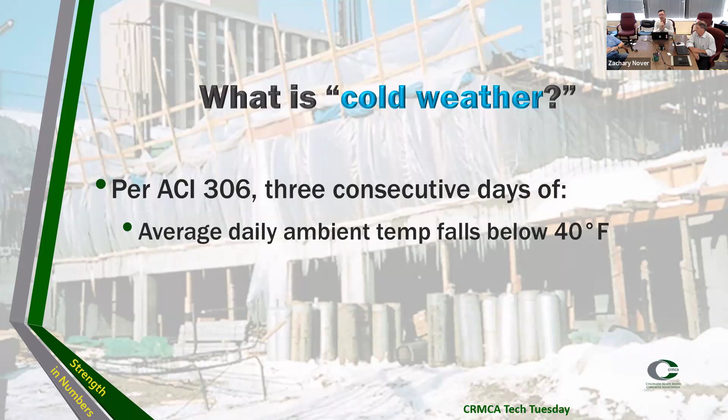Take the temp once an hour and average those temps together. If the average is falling below 40 degrees for 3 consecutive days, that is considered cold weather, and we'll want to employ our cold weather procedures.

Also, if the air temperature does not rise above 50 degrees for more than half a day in any 24-hour period, that's cold weather too. If we start placing concrete at 4 a.m., then between 4 a.m. and 4 a.m. the next day, if the temperature does not rise above 50 degrees for more than 12 hours, that is cold weather.

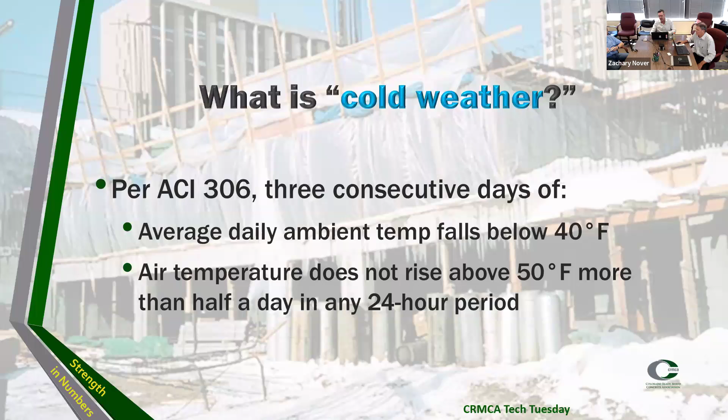So now that we have an idea of what we consider cold weather, let's talk about some challenges to cold weather placement. This shouldn't be news to anyone who's been working in the industry for any amount of time, but it definitely bears repeating, so let's go through a few.

Frozen ground. This is a big one - frozen subgrade soil, snow, ice, these sorts of things. You're going to encounter them. Maybe not necessarily if you just opened up a hole, but if your project is sitting out there in the elements, there's a potential for freeze, and we obviously don't want to place concrete on frozen ground. We're going to get into more detail on all of these.

Rapid temperature changes. This is a big one here in Colorado. We all know how the weather can change around here. Was it last winter or the winter before - I think it was like 70 degrees at noon and 10 below the next morning. So we definitely have our share of rapid temperature swings here in Colorado.

Improper curing - now we're talking curing compounds, finishing times, blankets. We're going to talk about blankets a lot because blankets are a big deal. You cannot get enough blankets.

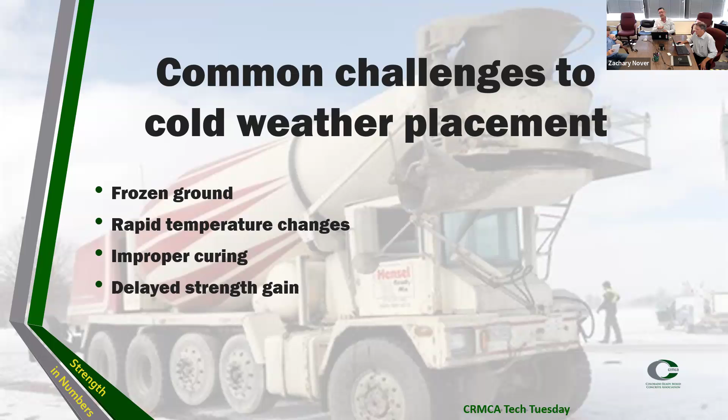Delayed strength gain - as the concrete temperature drops, it doesn't hydrate as quickly, it doesn't gain strength quickly. This is a big deal if, let's say, we're doing some emergency repair in the street and we need it to gain strength quickly because we've got to get that road open again. The last thing we need is our slab exposed to the elements, taking its sweet time to gain its strength.

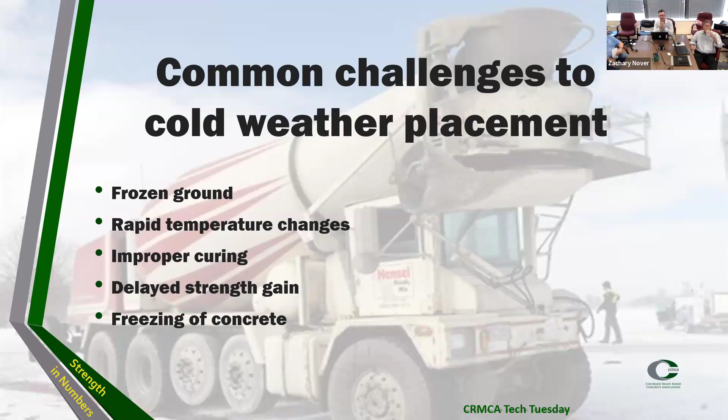And then of course, freezing of concrete - the absolute worst case scenario. We didn't cure it right, we didn't prep our subgrade right, et cetera, et cetera. Now we have actual water freezing in the concrete, which is highly detrimental to the finished product. So, frozen ground.

What's the problem with frozen ground? Well, one, it results in uneven curing and cracking due to the temperature differential. If I put in 75-degree mud in the ground and the ground is 25 degrees, once that ground starts to thaw, it's going to take a lot of the hydration heat out of my concrete. Now the top is going to be warmer than the bottom - it's going to cure faster at the top than at the bottom.

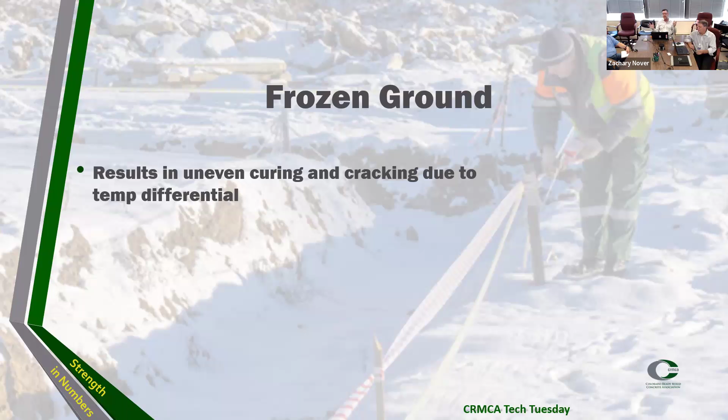Also, there's potential for subgrade consolidation or subsidence. This is really the big deal of placing concrete on frozen ground, because obviously when that ice and soil melt, that soil is going to collapse, because ice has a fair amount of volume, much greater than liquid water. So once that soil - it may seem solid, it may seem hard as a rock, and it probably will be hard as a rock.

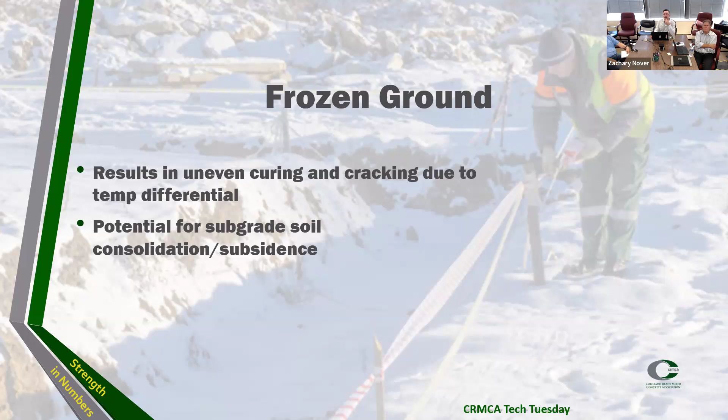It's got ice in it. So as soon as that concrete hits that soil and starts to melt that subgrade, your subgrade is going to start to shift, it's going to consolidate, it's not going to hold up. Even if your slab is perfectly placed, beautiful concrete, if your subgrade soil is frozen, you're going to have issues with cracking, subsidence, and just a poor quality product once that subgrade warms up.

So, rapid temperature changes and improper curing - what do we mean when we say a rapid temperature change? We just talked about it a little bit, I gave an example, but going back to ACI, rapid temperature change is generally considered to be a change of more than 20 degrees Fahrenheit within a short period, such as a few hours. It's not specific, like 45 minutes or 2.5 hours, just a few hours in general. And obviously as we're moving into cold weather, this is going to be a big thing in the fall, and a lot of times in the spring too.

It'll be gorgeous in the afternoon, and as soon as that sun goes behind the mountain, temperature drops really quickly. So that is a consideration when we're trying to get work done with our shorter work window that we have in the winter time.

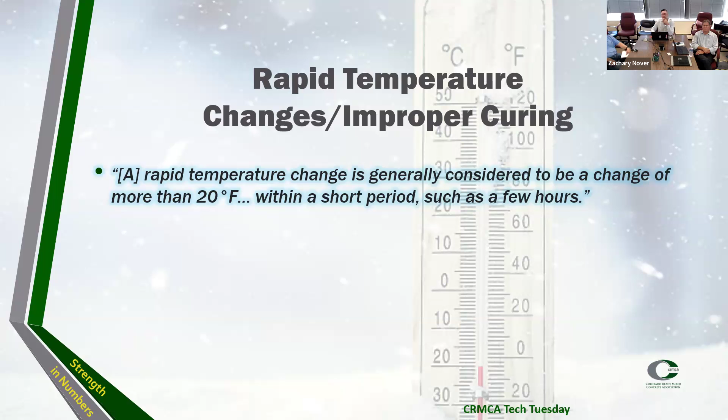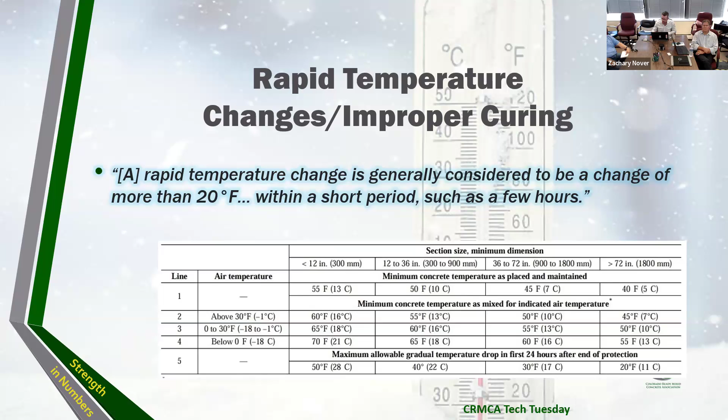Here is table 5.1 out of 306, just to give some examples of what they say. If this is the size of your slab, this is the thickness of your slab, these are your ambient temps, this is the maximum temperature change that's allowed to guarantee, or at least make it far more likely, that you're going to end up with a good product. So again, that's table 5.1. If you want to go over that, peruse it on your own time there, please do.

Freezing of concrete. Now we know water expands, right? Water expands up to 9% by volume when it freezes. So what's going to happen to my concrete? Put it down, it takes up this much space, but now that water starts to expand, now the voids in my concrete are going to increase, right? And then when that water finally melts, now I've got voids in my concrete. It's not going to be nearly as strong as it would have been, right?

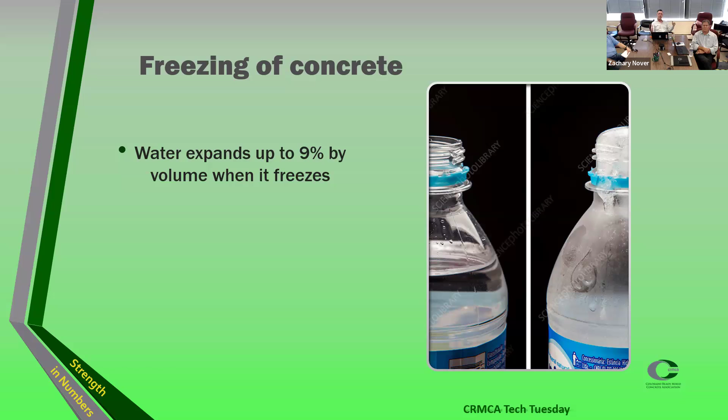Because we know even with air entrainment, right? We need some air entrainment because of the freeze thaw, because the water expands. We need some space in there. But we also know that, once you reach about 8% air, every percent that you go over is going to reduce your compressive strength by about 500 PSI. Again, because you've got more voids and less aggregate, less cement, right? So once that water freezes, expands the volume of our concrete, and then it thaws, now we've got all these voids in our concrete that are just going to affect...

Integrity of our slab. So we really want to protect against freezing. The concrete we can work in cool, we can work in cold, but the concrete itself needs to be maintained so that at the very, very least, we don't freeze, right? And the water in concrete capillaries begin to freeze at about 28 degrees Fahrenheit.

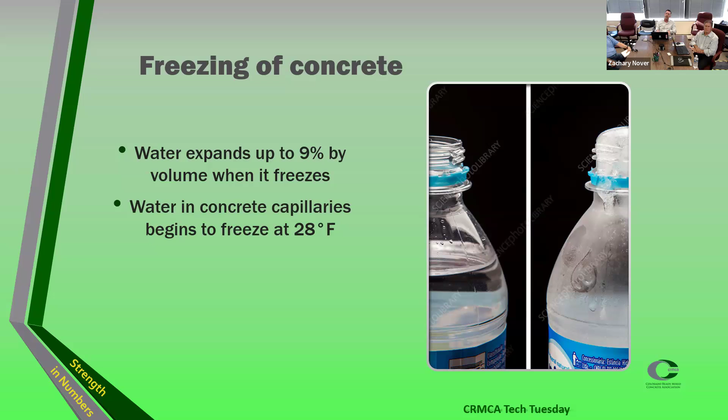Now, why is it not 32 degrees? Well, I suspect it has something to do with the heat, right? The exothermic quality of the cement hydration. So it's making heat in there. And pressure, I suppose, too. But now I don't want to get too far out over my skis. Someone who's more of a chemist or a physical sciences guy could probably explain it a little bit better. But this is one we really need to watch out for.

Concrete surface can begin to freeze above freezing, whereas the slab might not freeze until it's below 32 degrees. The actual surface can begin to freeze at around 35 degrees Fahrenheit. So really important when we're pouring our slab, and I'm mostly thinking about flat work.

It's not as much of an issue clearly when we're pouring into a form. If we're doing piers or grade beams or things of this nature, when you've got a big block of mud, it's not necessarily going to be so much of an issue. But when we're talking about flat work, PCCP, sidewalks, curb and gutter, etc., where it's going to be exposed until we can get the blankets on it, right?

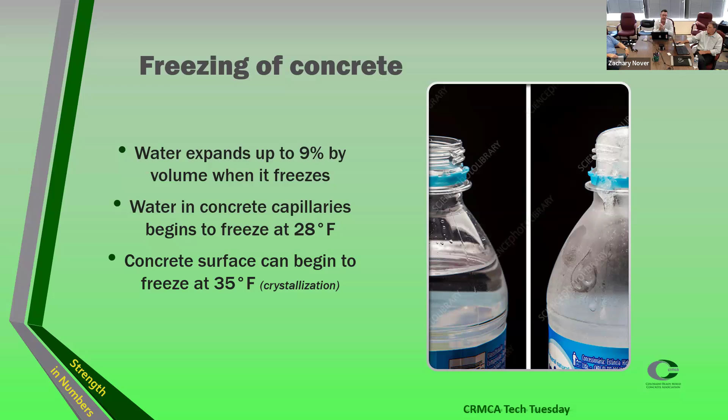So it's very, very important. We get that mud on the ground, we get out there, we finish it, we get the blankets on it before the sun goes down, so we can reduce the chances that we're going to have frozen surface. Because we know, when the surface is not properly cured, not properly finished, that's where we get spalling, that's where we get degradation of the concrete surface. So it's really, really important that we get that concrete on the ground, get it finished, and get the blankets on it as quickly as we can.

I recall one time I went out to the RTD bus barn out in Boulder. They were doing some work in the bus bay and had some high early mix because they wanted to get the thing back into production. So I went out there, I think it was September, and it was like 90, 95 degrees that day. It's a high early mix, right? They want to get the thing open. So I make my cylinders and put them in a bucket of water so they don't get too hot.

Next day it's like 35 degrees in the morning, and that bucket was sitting outside, cold water, cold cylinders. They wanted a one-day break, like a twelve-hour break. So I take it back to the lab. I know it might have broken at like 300 psi. I'm just like, oh my God, what did I do? Well, put them in the fog room. They warmed up. The next day they started making strength, and three days later they're right back where they should be.

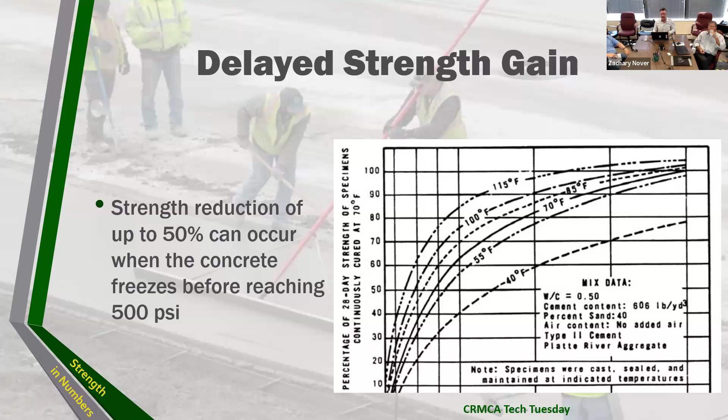All right, so again, keeping the concrete warm throughout the curing period is going to go a long way to making sure that we get the product that we intended.

So knowing all these problems we have with cold weather concrete, what are some mitigation strategies? I've broken them down into basically three categories: subgrade prep, placement procedures, and curing and protection. So we'll start with subgrade prep.

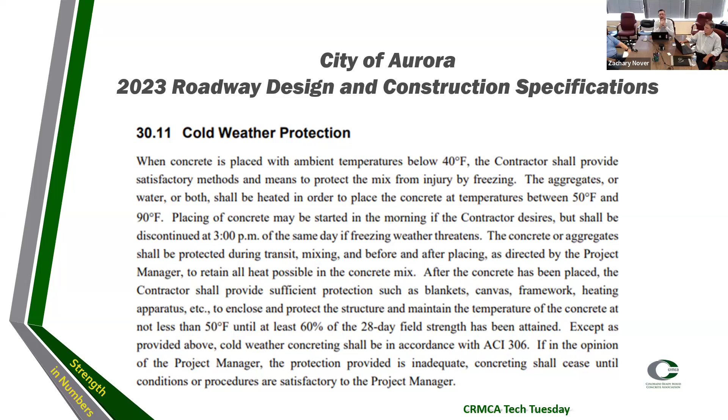That's basically what governs placing concrete. So everyone's going to basically follow their specs in accordance with 306, tweaking it here and there depending on what your local situation is.

So again, subgrade prep. This project was one I worked on for the city a few years ago — the Tollgate Creek Trail Phase 2. As you can see, it's a bright sunny day, there are their blankets. They came through the day before, scarified, moisture conditioned, and recompacted. I cannot stress how important it is that the subgrade be properly prepared.

Again, you could have the most beautiful mud, you could have the most crackerjack crew, ace finishers, your blankets — you've done all that stuff.

But if your subgrade is not good, and this goes for anything you're going to build—we're not talking asphalt, we're talking concrete, but anything you put on the ground—if that subgrade is not properly prepared, it's not going to perform the way it should. Your breaks might come back through the roof. Oh my God, 5,500 PSI at 7 days, this mud is great. But they didn't pull all the chunks of rock, ice and snow out of the subgrade before they placed it. So guess what? In the summertime, we got cracks everywhere.

What happened here? It's so very important before you build anything, prepare your subgrade. We're talking cold weather, and I'm focusing quite a bit on flat work, but this all applies to any concrete structure, whether it's in forms or in the ground. Drilled piers is a whole different animal, we're not really worried about that so much, but we do, because we don't want our hole to collapse. We don't want ice and mud in the bottom of our drilled pier either. So even in that instance, you need to clean up your workspace and make sure your soils and surrounding environment are properly prepped to accept concrete.

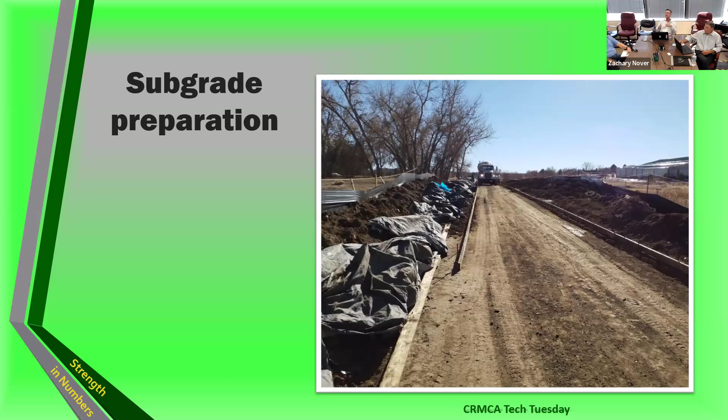So again, these guys did a really good job, this came out really well. As you can see, they were out there the day before, they cut it to grade, and places where they needed to condition, they did. We got our density testing, everything looked good. They had their blankets on it all night, and this is probably 9 or 10 o'clock in the morning. They probably did 50 or 60 yards, because we had that shorter work window. We don't want to go into the afternoon. By the time we get into that last truck, we need to be pulling blankets, the sun's about to go down. So subgrade prep is just so important.

So different methods of prep: one, you can remove and replace your frozen soils. That seems like a no-brainer, but if you've got frozen soil—and everything in Aurora is clay, and clay typically has a pretty high moisture content, it likes water, or rather the water likes the clay—so frozen soil is quite a problem. Whereas in some places we have sandier soils, it might not be as big a deal because it's easier to thaw out, and you might not necessarily need to pull it out and put it back in.

You might want to do something like ground heaters. Ground heaters will work on anything, but it depends on what you're going to build and how suitable or unsuitable the soils are. If it's good material and you can get away with just throwing some heaters out there and keeping the ground above 32 degrees, preferably warmer, throw some blankets over them, that's great. But if it's somewhere near a watershed or in a lower elevation, lower topography, where water has been collecting and there's 3 feet of ice—I remember one project where they had to get out there with a D6 and just rip it because it was 3-4 feet of ice. Ground heaters would not have done a thing there. So if you can condition the soil without having to tear it out or heat it up, that's great.

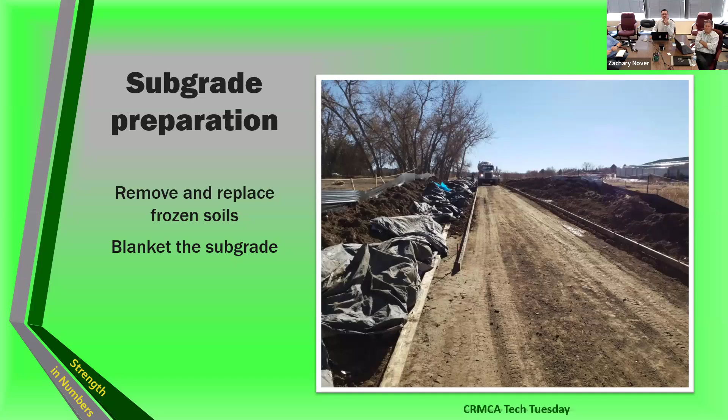So subgrade prep, right? Very, very important before we build anything. Make sure that the subgrade is suitable for placement. So we got our subgrade prepped, it looks good. Here we go. Here are the guys again out on the trail. There I am taking my picture.

When we're placing the concrete, plan around the weather. This is probably 9 or 10 o'clock in the morning. We got out there early enough to pick it up and keep pretty good production on this job, we put a lot of concrete down. This was in December, I believe, and we put quite a bit of concrete down in December. But we had a shorter work window. We would get out there and place concrete 9, 10 o'clock, maybe by 2, certainly by 3 the finishers are off of it. The blankets are on it when we're packing it up for the day.

Zach, we have a question.

When would you say it's safe to remove the blankets? From the subgrade, or from the concrete? For the concrete, I would say you leave the blankets on until you're about to pour. Leave them on until the guys are standing there with the tools and the truck's rolling up, then you can pull your blankets off. You can keep that heat in for as long as possible.

For the concrete itself, typically we'd want 5 days, 120 hours, something like that. We're not trying to get out on it. Something like this, which is just a recreational trail, we're not worried about getting it open right away, so we can leave those blankets out there 5 days.

Definitely you'll want to maybe take some extra cylinders when you're testing it and break some early. Of course, the lab cure is not in the same condition as the field, and we'll talk about field cure systems and cylinders a little bit later. But if you're worried about getting it open, if you have time, leave it out there for 5 days. If you're really worried about it, take a couple of extra cylinders, do a 1 day break, a 3 day break, a 5 day break, whatever you need depending on how quickly you feel like you need to get on it. But if you're not in a big rush, I would say 5 days.

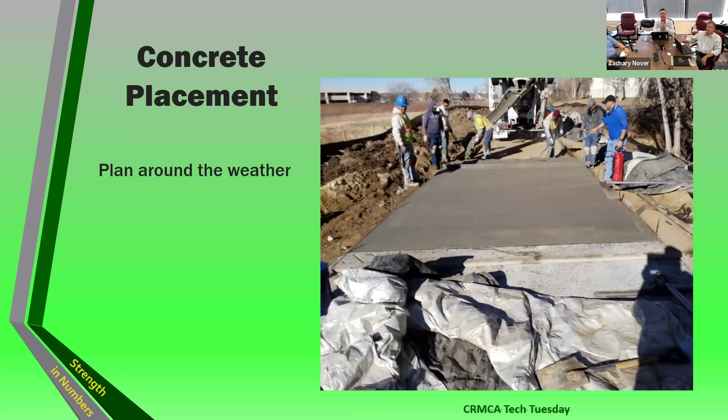So definitely your QC is going to be a big help in determining when you can uncover, when you can actually get out there on it. With inclement weather, it's going to get colder, it's going to get darker, our work window is going to get shorter as we move into the winter season. Limit work hours to the warmest part of the day. Don't get out there at 6 o'clock in the morning and pull the blankets when the concrete truck isn't going to show up until 10 o'clock. You might not do serious damage, but why invite trouble?

So material temps - this is something I solicited some opinions on from engineers and inspectors around the city, just to get a rounded perspective. Someone brought up material temps, not just the concrete. We batch with hot water, might batch with heated aggregate, or both, depending on the weather. And this isn't just for ready mix, even though this is CRMCA, but also grout and mortar.

What does the spec say? When it drops to 40 degrees, you heat the water. If it drops to 20 degrees, heat the water and the sand. But also things like the rebar - was the rebar sitting out under a pile of snow before the guys tied it in there? Because if I've got rebar that's 15 degrees and it's inside of my slab, that's going to cause trouble - I'm going to get uneven curing, it's going to suck the heat right out of my concrete.

Rebar was definitely the big one, but also make sure your forms aren't all icy. The tools you use and everything - make sure that everything is, if not warm, at least not frozen. So it's not just the soil, it's not just the concrete, but the forms, the rebar, especially if there's a lot of rebar in there. There's typically not a whole lot of rebar in flat work - cross pans and things that get really heavily used. This obviously doesn't have any rebar in it, that's not something we had to worry about on this job, but just temps of everything - not just the mud, not just the soil, but the ambient temps and material temps.

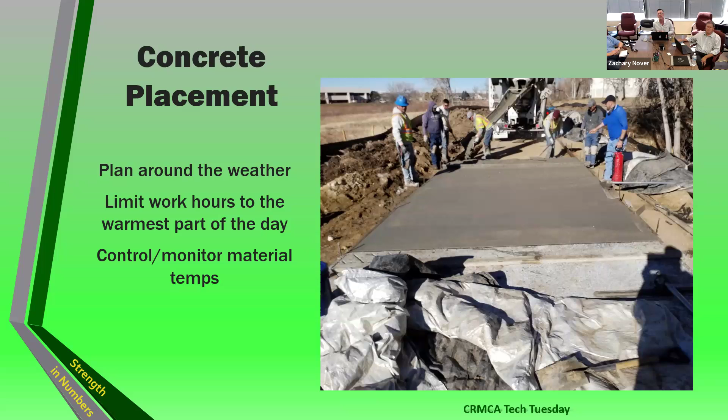Not to be a broken record, but temperature - maintaining things as warm as possible for as long as possible while we're doing the work will ensure that when it finally does cool down, we're in a good place.

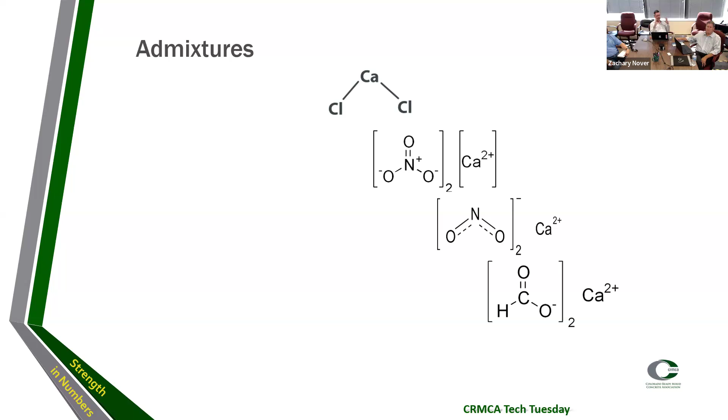So, admixtures - I really don't want to get out over my skis here because I'm not a chemist, but I made a nice graphic. Admixtures are a way we can help ourselves out when we have a shorter work window. Of the many admixtures, the ones we're concerned about for cold weather are the accelerants, and of course everyone's favorite, calcium chloride. This is tried and true - it's been around forever, and it works really, really well.

But the drawback to calcium chloride is that it will corrode your rebar. That chloride ion really wants that electron - it's going to do what it can to steal them off that steel. And so that's why most places, and the city is one of them, will not allow calcium chloride admixtures in anything that's got steel in it.

Just makes sense, right? And that's why you folks that work on CDOT projects know you need to submit an extra 157 for your epoxy, for your rebar. Because even if we're not putting calcium chloride in the mix, road salts - using magnesium, mag chloride, and different salts they use for melting snow - that's still going to get down into your concrete, and eventually find its way down into the rebar and start corroding it. So calcium chloride works fantastically well, but it doesn't play nice with rebar.

So there are others on the market - calcium nitrate, similar calcium nitrite. These actually form something like iron hydroxide - it's sort of like a patina, like copper. When copper has been exposed to the elements it gets that green patina, and that stops it from corroding. It's sort of the same thing - it actually develops a little coating on the steel, which will just inhibit corrosion basically.

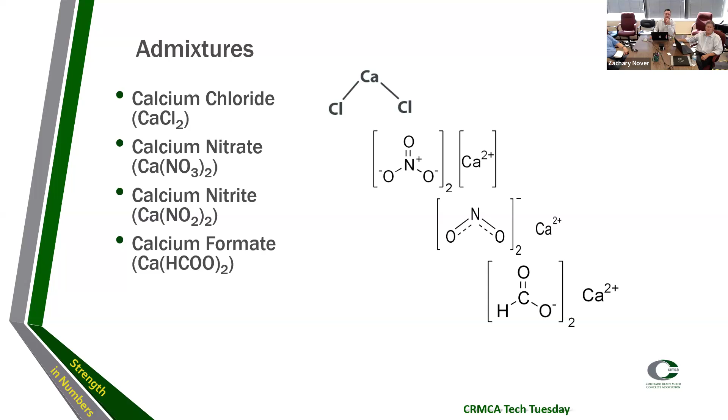Calcium formate is another one out there, and then of course there are some based on aluminum that I don't really know too much about, but there's a great ACI bulletin if you're really interested - ACI educational bulletin E4-12, chemical admixtures for concrete. It really goes into the chemistry of it. But just know calcium chloride works great, don't use it when there's steel around. There are these other admixtures, I think calcium nitrite might be used as a plasticizer as well. A producer could probably speak to this with more knowledge than I can, but if you're really interested, it's a great bulletin.

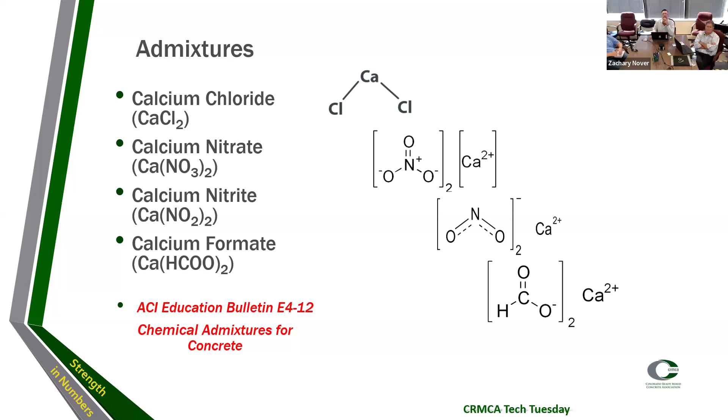And then it goes into real detail about all the different admixtures. So, we batched our concrete, threw some calcium chloride or not in there to speed up our hydration. We got it on the ground, finished it, curing.

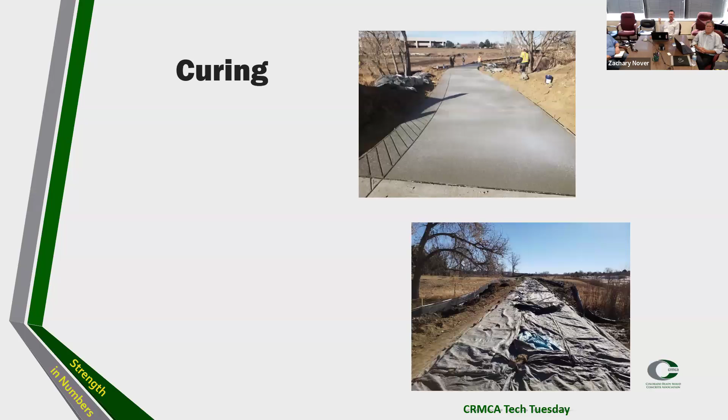Now, this is not the... I like this picture because it's a nice slab. It's not the best coverage for the curing compound, right? There's obviously a method for application. You want a nice even coat. These guys could do a little better. But curing compounds, making sure it's adequate placement.

But curing compounds, and then of course, again, coverage. You guys didn't do such a hot job, but it's important to get that curing compound on there. Protect your surface, right? You spend all this time, your finishers are just crackerjacks, they've done such a great job. Don't let it be ruined by improper curing, right?

And then again, blankets. You see, this is the same project. We've been out there, it's a little in the afternoon now. We put the slab, it may be the next morning, you can't really tell. But see, these guys did. Look at all those blankets. Good coverage. One in the middle is a little bit torn up, but the slab is completely covered.

They got on it right after they finished it, put the curing compound on, and I can tell we had very little trouble with concrete on these jobs. And most of the concrete was placed... I wouldn't say most, but a good portion of it was placed in the wintertime.

We had the project started in September, but had various delays, yada yada yada. We didn't really get to put a lot of concrete down until like December. And so we placed all through the winter, and we really did not have a whole lot of issues. We didn't have too many little breaks. We didn't have to come back later and pull stones out because these guys were on it. They were good at working in cold weather.

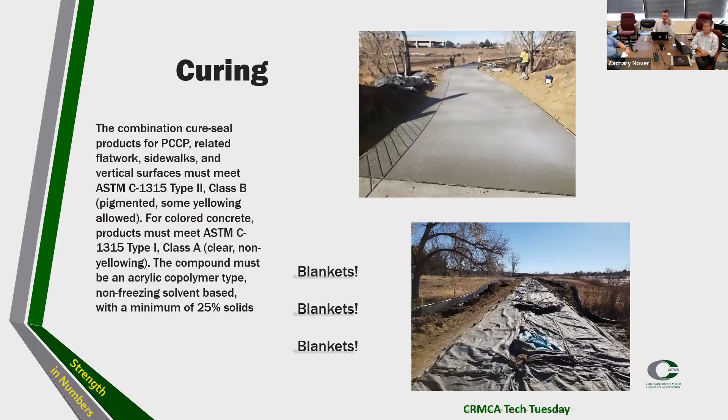So once you've got your concrete placed, finished, cured, get your blankets on it. It's all part of the curing process. So that when we pull the blankets off 3 or 5 days later or whatever, we've got a lovely concrete surface.

And quality control - this is, you know, we need somebody out there to make sure that all these things are happening, right? Cure box, make sure you've got a lamp in there or something to keep it warm. Make sure you don't just set your cylinders in a bucket next to the pour and expect them to be okay. We want to get, obviously, lab cured cylinders - that's an ideal. They're like the best case scenario.

Really, I look at it as it kind of just proves the mix, right? The supplier sent out a quality product - that's what they're supposed to send. We cured it under the best conditions, and it came out gangbusters. But the only way we're going to get good breaks is if, when they're first cast in the field, the technician is taking good care of them, right? So cast your cylinders, cure box - make sure it's insulated, make sure there's a light in there.

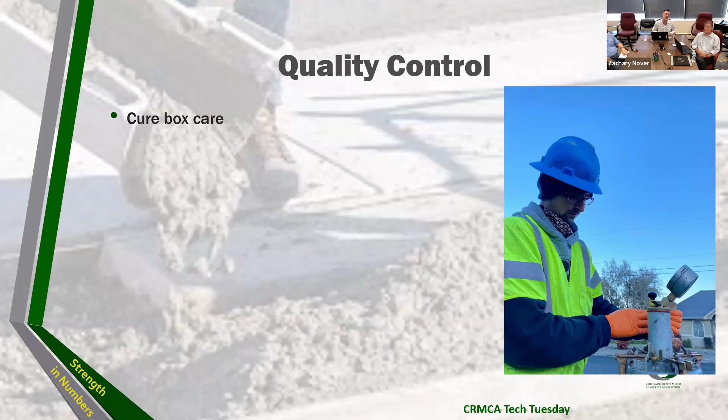Min-max thermometer, you keep track of what it's doing. Is it staying warm enough? Is it getting too cold? Is it getting too hot? 60 to 80 degrees for the first 24 hours is the spec for your cure box, so make sure your temps are staying where they need to be.

Field cures. We mentioned field cures a little while ago. The City of Aurora does not rely on field cure cylinders because they vary too much. They're not dependable. Think about it, let's say I've got 60 yards of 6-inch slab out there. It's making some heat, right? It's cooking, the cement's doing its thing.

I take these little 4x8s and try to stick them under the blanket next to the slab. Well, they're not getting nearly as warm, they're not curing nearly as fast. And also, what happens when I make my cylinders, stick them under the blanket, and walk away for the day? Anything could happen. The guys come around moving tools, they kick them, they roll out from underneath the blankets, or somebody comes along in the night and takes them. Who knows? Anything could happen.

They're not consistent enough. We'll make them if the contractor wants them, but we don't really rely on them. As for when you're going to pull your blankets, if I take a field cylinder and break it and it's real low, I'm not going to rely on that to tell me when I need to pull my blankets off. It might tell me I need to leave them on a lot longer than I would have with better information. But field cure cylinders don't give you that. It's a good idea, and in an ideal environment they could do something for you, but the city just doesn't rely on them. We don't require them.

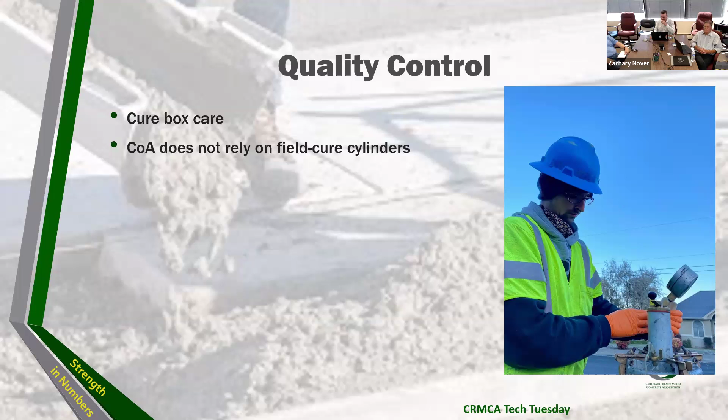They're not reliable. I'm not saying they don't ever provide some useful information, but the City of Aurora does not rely on them. Maybe for post-tension applications, something like that, if you're looking for a number, and if you can cure them properly in the same environment as the slab you're trying to stress. But there are just too many variables, so again, the city doesn't rely on them for anything other than a curiosity.

Maturity meters. We do allow maturity meters, but they're only allowed to estimate strength. We still insist on compressive strength, we want destructive testing. Maturity meters are not super reliable, and not everyone understands how to use them. So we don't tell contractors they can't use them, you can estimate your strength if you know what you're doing, but ultimately we don't rely on them.

We don't rely on them as a basis for action. I would never say go ahead and strip the forms based on what the maturity meter says. That's less of a concern with the city because we do a lot of flat work, PCCP, sidewalks, and so on. But if I'm building a bridge and I want to know when to pull the falsework off, I am not going to rely on a maturity meter. I want to have QC out there.

They're going to be pulling lots of cylinders. We're going to be doing lots of breaks. I'm going to rely on that because that's some serious business. You pull your forms and the concrete's not ready, and it can be a bad day for everyone involved.

So we do allow them, like I say, but they're only for an estimate. Typically, if we're that concerned about it, we'll just use a high early. If it's something we really want to get open, we'll use a high early or something.

On the maturity meters, have you or has someone done a correlation or comparison of the maturity results versus field results and seen what the percentage is off or similar? We haven't done a whole lot of that. Basically, when we do use them, we'll cast our cylinders to develop the curve, but after that we haven't done a whole lot of A-B comparison.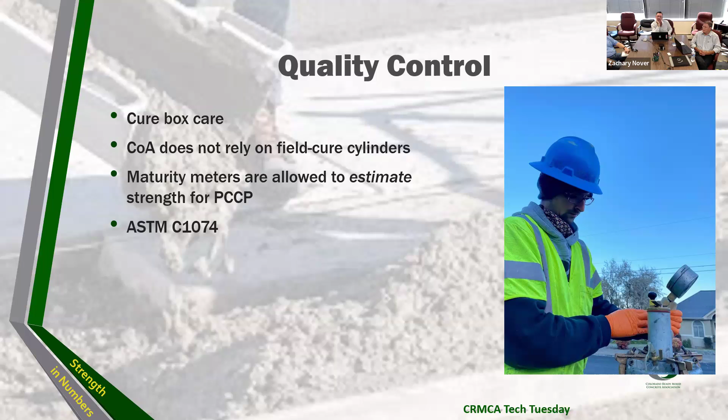And again, referencing C-1074, it'll give you all the information you could possibly stand with regards to how to use maturity meters and how they work. And there's some other materials too. Tech Tuesday had a presentation on initial curing, and then of course good old ASTM C31, making and curing specimens.

Make sure that you get the best specimen you can, so that you get the most accurate information you can, so that you can make the best call that you can. So definitely plenty of literature out there if you want to look into it further.

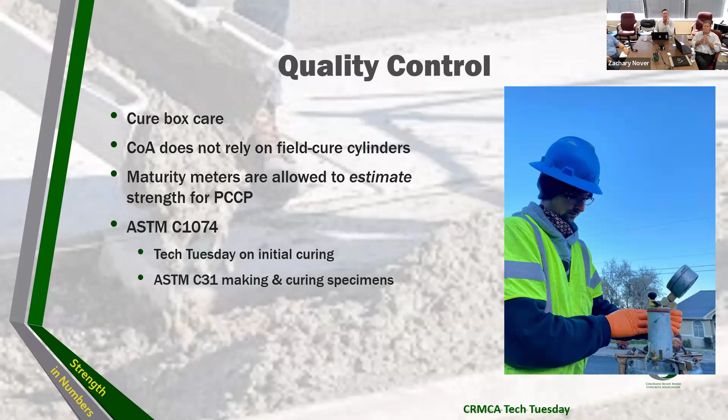But certainly quality control is part of our cold weather procedure, and it's part of our hot weather procedure too, but just in general, you need to have someone out there keeping track of what's going on the job, whether it's hot or, in this case, really cold. So I encourage anybody interested in learning more, there's some resources for you.

And then of course, the last thing, we can talk all about this stuff, it's great to know this is the way things should be done, but everyone needs to be on the same page, right? These are the things that need to be discussed at the pre-con. These are things that need to be followed up on at the progress meetings. Are we implementing these procedures? Are they working? Are there places where we need to improve? Is some of this information not getting out there?

If I'm getting low concrete breaks, what's the problem here? Oh, I didn't know you're supposed to do this, or I didn't know you're supposed to put hot water in it when it's this temperature or whatever. It's just like everyone has to be on the same page.

It's really critical that it's all well and good to have this information, but if it hasn't been disseminated, if all the guys at toolbox talk aren't on the same page, there's miscommunication, if there's lack of coordination, you can talk all day long about cold weather procedures, but if everyone isn't following them and there's not good coordination, something's going to get lost. Something's not going to come out right. Something's going to be pulled out and replaced.

Something is not going to perform to our satisfaction, so it's important that everyone knows proper procedure and is on the same page. That's why we have regular meetings, from the project owner, the project manager, the producer, the site super, down to the guy out there on the bull float. Everyone needs to know the proper procedures for working in cold weather. And your project should come out to be all cake and pie.